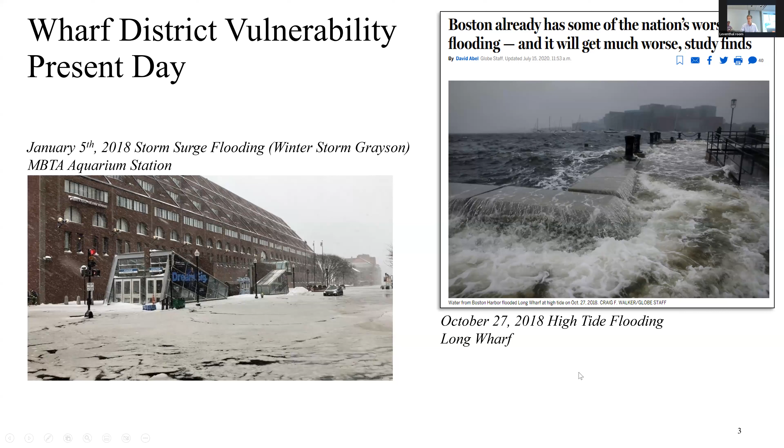And it's not just those storm surge events, it's also high tides coming over. We're seeing more frequently flooding over our harbor walks and into property areas, even during sunny days during our wicked high tides. So on the storm surge side, we produced this map showing the flood extents in the Wharf district. This is in 2070, based on the most recent modeling by Woods Hole Group that the state is using for all of their planning. This is a 100-year, or 1%, storm event - basically that Winter Storm Grayson, which previously extended flooding down Long Wharf and up into Atlantic and State Street. It's looking to push out even further into a lot of areas.

Can you explain - this was one of the most striking visualizations in the report - can you describe for a layman like me what is meant by a 1% storm surge? What is that defining exactly? It's a great question, an unfortunate term us techie engineers have used too often. It means there's a 1% chance of this event happening in any given year. That doesn't mean you've got a 1% chance of it happening in 100 years - it's a 1% chance in a given year. Those probabilities add up, so over a 50-year period you've got something like a 39% chance of this happening. We typically look at big infrastructure projects with a 50-year design life, so you're almost at a 1 in 2 chance of this occurring over that investment period, if you think of it in those terms. Thank you.

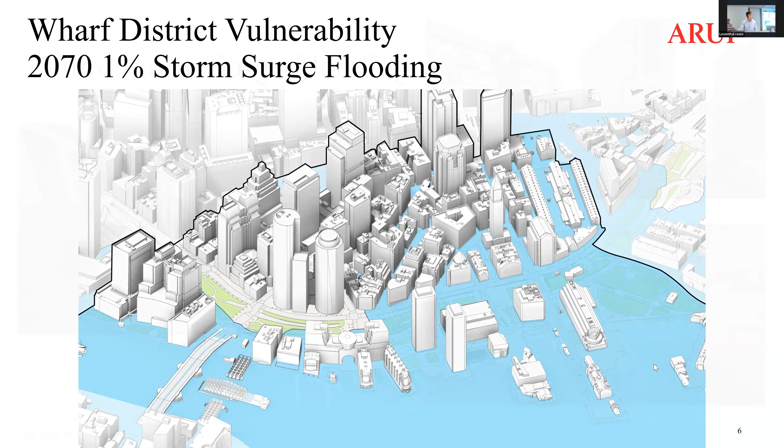This is not produced by our plan, but just to show these images produced by Boston Water and Sewer, showing what an even more frequent event might look like. This is a 10%, or 1 in 10 chance storm happening in 2070. You can see the flooding throughout the Faneuil Hall area and State Street.

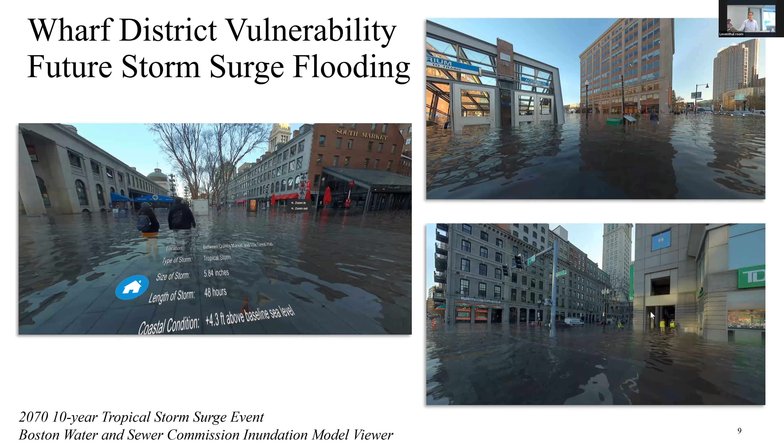As I mentioned, it's not just storm surges, it's also tidal events. So some of the numbers we've been looking at, as recently as 2021 we were experiencing 7 days of flooding during sunny day events, during high tides. We're currently looking at, just a few years later, 11 to 18 days. And by 2050, we're looking at 50 to 70 days of tidal flooding in Boston, is what we're projecting.

So these are frequent events that aren't just storm surges, and there will be a lot of nuisance flooding that we need to deal with.

So we've got waterfront transportation in terms of MBTA systems. We've got ferries, we've got tourism, in terms of all the various water boats that Matt and his team are running and everybody else out there. We've got marinas, we've got the Harbor Walk itself, all at risk if we don't have a flood protection system. We've got the aquarium, we've got MBTA's Blue Line and Silver Line, we've got the Central Artery Tunnel.

Bringing people into and through the heart of our financial district, as well as many historic assets and public assets throughout the district. And Derek, I think it's fair to say that that was the basis for coming up with the $3.9 billion of infrastructure that is at risk and is what we're trying to protect.

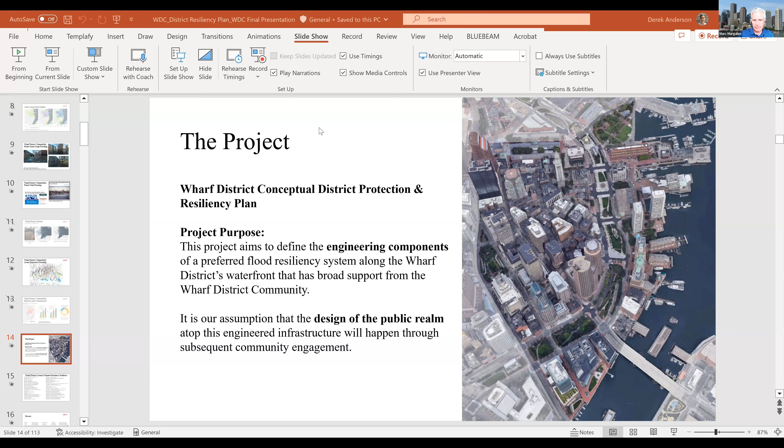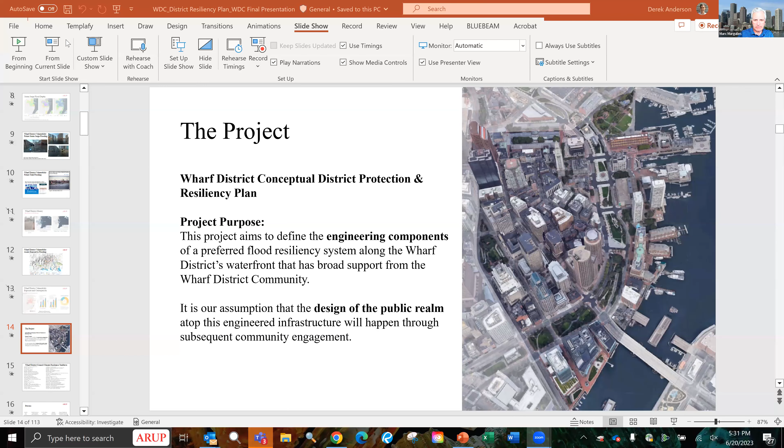Folks in the room, we're no longer hearing you. Oh, I just heard you. Yeah, the room is quiet. That's so strange. Norm, are you still there? I am, but I'm not in the room, I'm remote. I'm just gonna call Suzanne. The room audio is gone, it's gone for all of us. Tell Doug, just tell Doug. Make sure we're muted. Joe Christo just posted that there's a team in the room working on the problem. All right, we got some audio back from you guys. Try your... that was just a speaker. All right, we're giving this a try, can anybody hear me now? Yes, we can, that's fine. All right, I'm gonna have to just do it off your laptop, Mark. Turn the owl off and just use the audio on your laptop, perhaps. I think the owl, literally no one touched the thing and it just randomly started to... yeah, we heard the Zoom thing sort of go weird. Let me see, yeah, so we'll use Derek's audio. Yeah but I called in. Okay, I just muted the Leventhal room. Go ahead Derek, you should be good. My audio speaker. Yeah, leave that. All right, how are we doing now, can anybody hear me now? Yes, that's good, all right, we can hear you, go ahead.

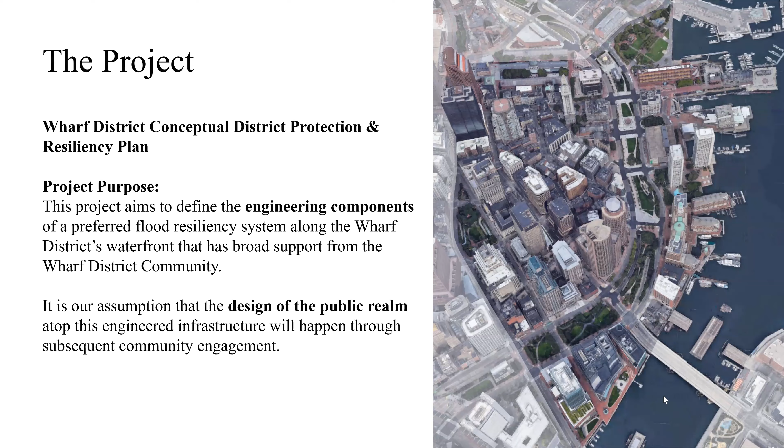Again, a big thank you to the Climate Resilience Task Force. A great number of folks with a great amount of information and knowledge contributed to this project. Thank you all, as well as many other stakeholders who've been involved in the process. I won't hold here too long, but it's fantastic to have a wall of text representing the people engaged in this process. I usually hate wall of text images, but in terms of the general process here, the Wharf District Council established a Climate Resilience Task Force that helped manage the process.

Then we dove into due diligence, collecting data. We established evaluation criteria, which built off the public engagement the city had done with their Climate Ready Boston work, as well as additional engagement with stakeholders throughout the district. We used those evaluation criteria to rank and identify preferred flood resiliency strategies, from which we created a series of alternative designs. We presented those alternative designs to various stakeholders, and with their input, developed a preferred flood protection strategy end to end of the district.

We solicited feedback from many stakeholders at that point on that preferred solution. And the result of all that community engagement is reflected in the final design plans and report, which we issued a couple of weeks ago.

We're now moving forward, really engaging the community in continued conversations about this flood protection system and what that means for the Wharf District and surrounding communities. We're looking to continue coordinating with funding and implementation agencies to keep the momentum going, really transition this to something actionable, and then support neighboring communities with their resiliency planning. A great amount has been learned through this process that we're looking to share with other communities, as well as coordinate with abutting neighborhoods.

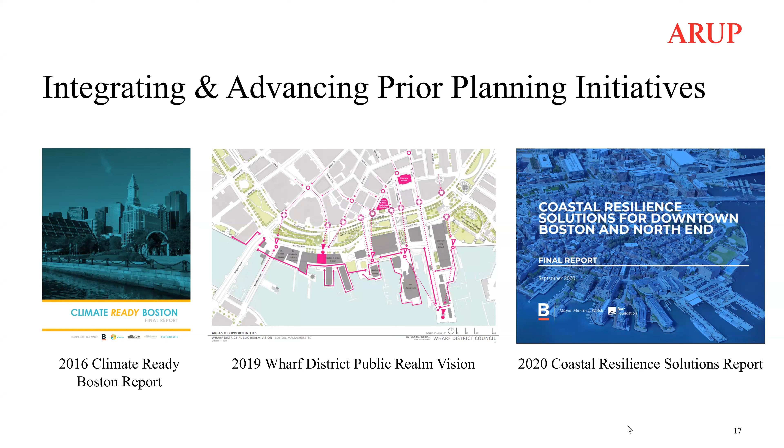As I mentioned, we built off the city's prior work: the 2016 Climate Ready Boston report, the 2020 Coastal Resilience Solutions report, which laid out a lot of the foundation for what we're able to do here, identifying design flood elevations at a variety of different types of locations and different types of strategies that could be applied, from which we were able to narrow down to our single solution, as well as the Wharf District's previous public realm visioning process in 2019.

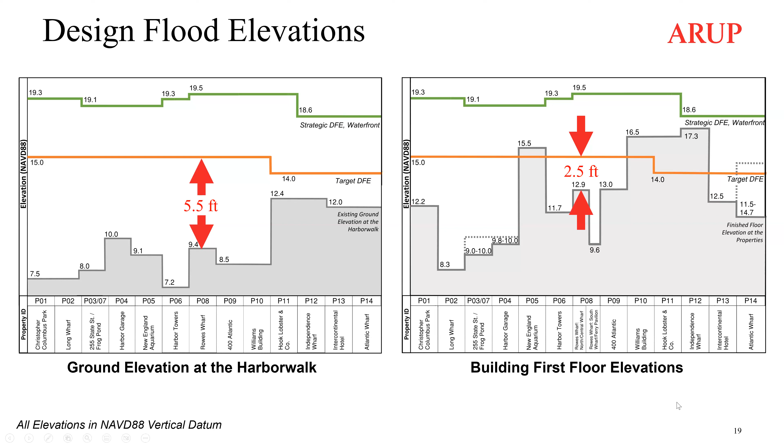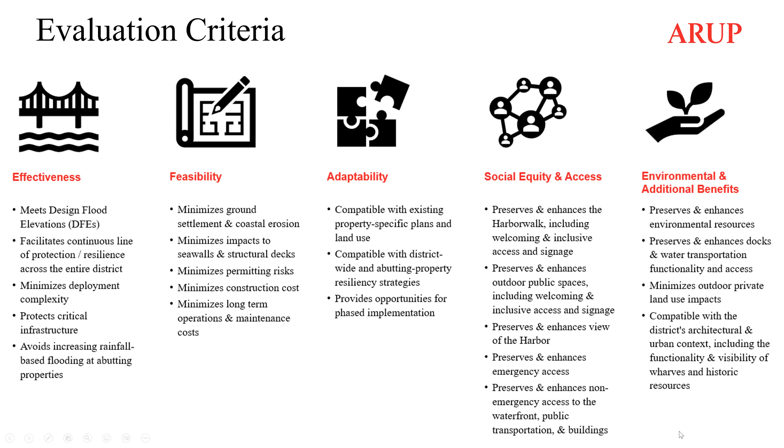This is really the decision-making process for when you look at one strategy and try to compare it to another. How do we do that in a transparent, repeatable fashion so that we're treating every property fairly to the same metrics? With this, we're able to rank different types of strategies for things like effectiveness, feasibility, and adaptability, as well as social equity, access, and environmental and additional benefits. This is a really nice tool that I think a lot of other districts can use and build upon.

One of the significant considerations in this process was social equity and access, particularly access to the waterfront, public transportation, and emergency access. We set out, and I think achieved, our goal of maintaining and really improving access in a lot of places, both emergency access as well as access to the harbor walk and to public open spaces, especially along the waterfront, accessible routes to the water and to various transportation opportunities.

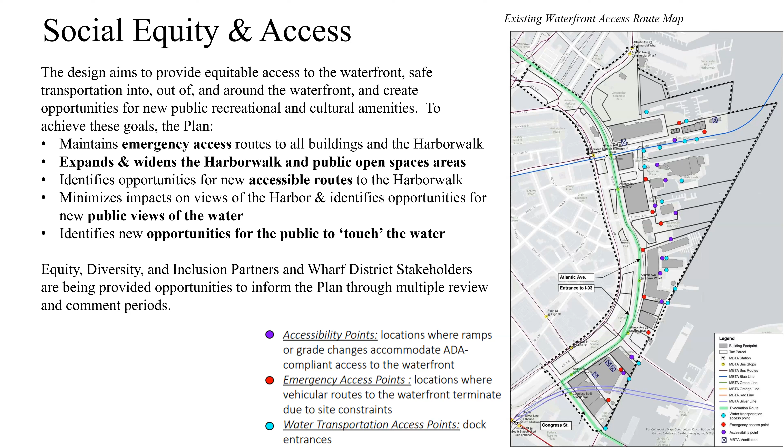To put it into numbers, this plan is about protecting from flooding, and that means real changes to the harbor walk, in a lot of cases raising the ground. We've managed to do that while also making things better, we think. We're creating 21,000 square feet of new harbor walk, over 90,000 square feet of new publicly accessible open space, and adding over 2,000 linear feet of docks, where water transportation, marinas, and water access is so important to the Wharf district.

That's at the district as a whole, as well as at each. We've identified 6 different projects within the district, and even at every single one of those projects, we're making sure to at least maintain, if not increase, each one of those metrics.

As for the resiliency plan itself, this is a plan of the existing conditions of the Wharf district. I mentioned we've broken down the district into 6 projects. We call those sub-district projects, just to make things a little easier to construct, as well as allow phasing so that we can address the most at-risk places initially and move on to the places that are less at risk as needed as time goes on.

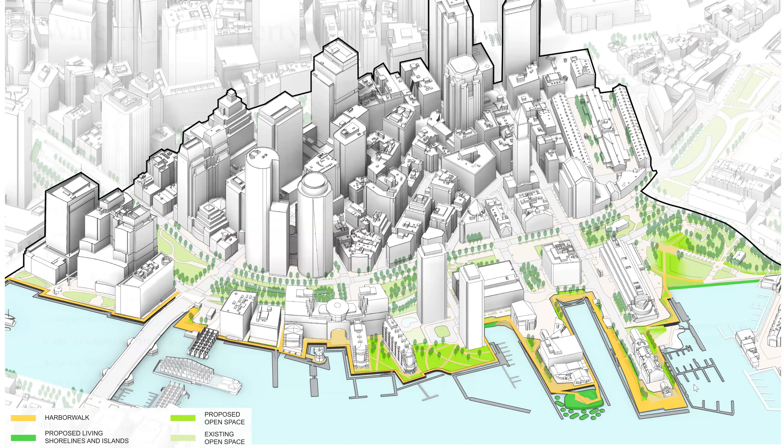I do want to highlight at this point, it wasn't just about a design. A big part of this process was the engagement process, where we had a number of workshops with various stakeholders in the district, in particular every property owner where we have private or public property where we need to install these flood protection systems, and those properties that need to be significantly modified in some cases to protect our district. We met with each of them, had a series of workshops, and I'm very proud to say we've been able to gain the support of every single waterfront property owner end to end of the district for this solution. So not just a design effort, but a big community engagement effort, and that really came from a lot of you all being part of this process and having a common goal and coming together around how to get this done as a community. So that's something I think to be very proud of here.

And also, this plan is not just a single waterfront solution. That plan I just walked through, on that beautiful image our Halvorson friends produced along the waterfront, is shown here just as a gray line for reference. We're also proposing a number of legs, if you will, flood protection systems that stretch back away from the waterfront system to natural high points in the district. Those are represented by these green lines on the screen here.

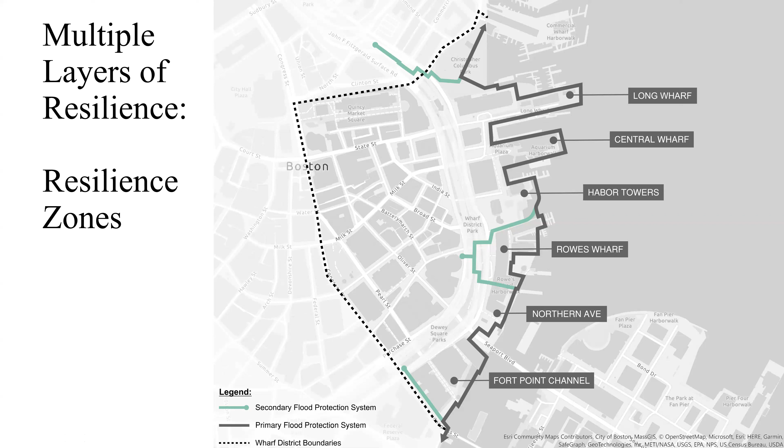So what each of those legs do as they come back in is create 3 resilience zones. Each of these 3 zones can be built independently of the adjacent districts, and they will be protected on day 1. So we don't need to wait for the entire city to come online. The North Resilience Zone, which includes Christopher Columbus Park down to Harbor Towers, can be built initially, being one of the most at-risk parts of the district, already experiencing flooding. We can build those little legs coming back into some high points there, and that area will be protected.

And then as the other zones come on, we start adding additional layers of resiliency. So at that point, those legs will act as a redundant line of protection, so that if there's a single point of failure anywhere, we don't have widespread flooding throughout the district.

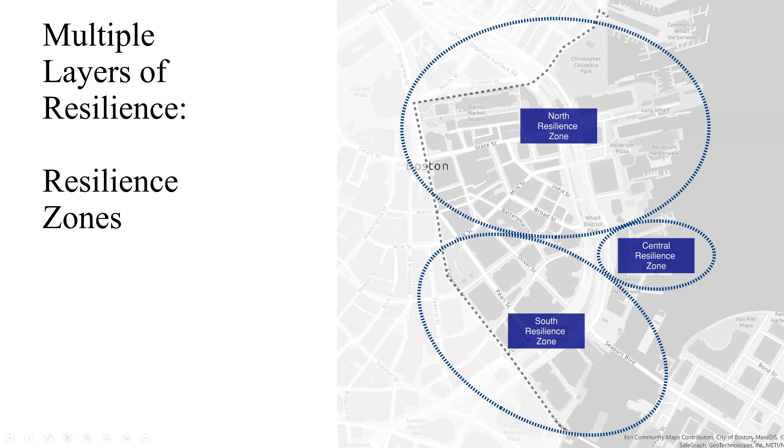The plan that's proposed also provides a number of community benefits. This is an example cross-section at Harbor Towers that I think illustrates some of the opportunities we've identified.

In addition to protecting from storm surge flooding, we're identifying opportunities for new shade trees and shade structures to deal with the heat issues out here. We're also identifying extensive new stormwater infrastructure to deal with rainfall on the dry side of these systems, including new storage tanks and pump systems.

There's lots of new public waterfront open space throughout the district, maintaining accessible harbor walks and identifying ecosystem opportunities. In many cases these ecosystem opportunities aren't necessarily green vegetation, but there are things we can do to soften that edge instead of just having a vertical wall with no ecosystem benefits that results in significant wave height. We can provide riprap and other solutions, revetments along the edge to soften things up and create opportunities for filter feeders and similar organisms.

And then, of course, one of the things that makes the Wharf District what it is, is the wharfs — the operating waterfront, the docks, the marinas — so really maintaining water transportation throughout.

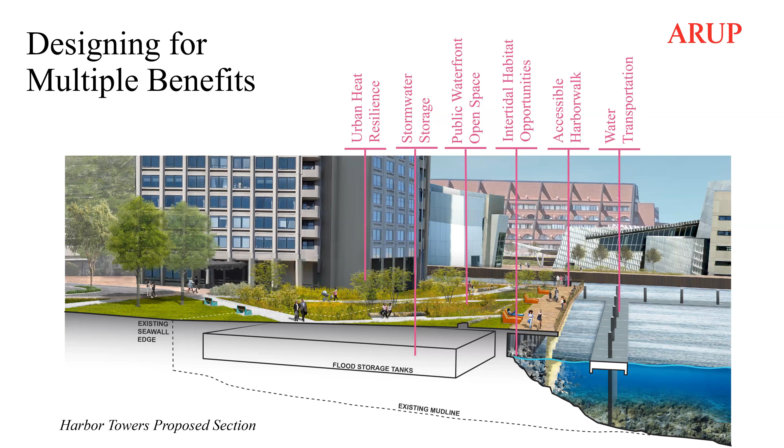This next image puts a bunch of little stickers around the Wharf District where we've identified many additional benefits that go beyond flood protection: opportunities for water recreation and transportation, new views from the water that don't exist today, improved access to the harbor walk in many places, and vegetation, shade structures, and ecosystem benefits.

Again, at this stage we're really just identifying opportunities. This is a concept design we've done, and there needs to be more study and more conversation with the community about what the right solutions are. What we've done here is identify those opportunities so we can start having a meaningful conversation about how this plays out as designs advance.

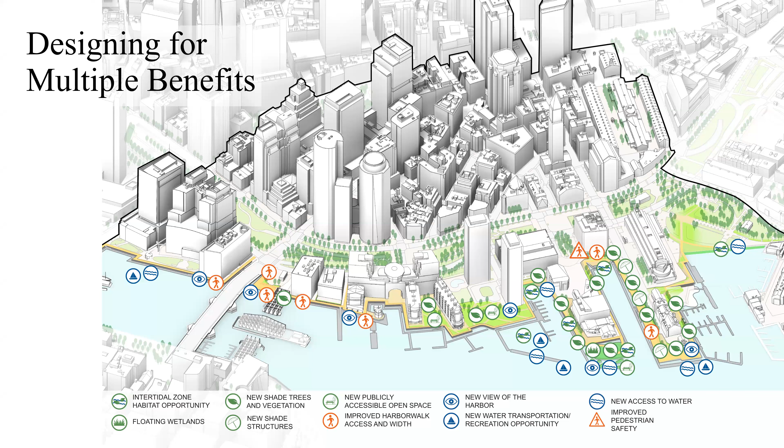One of the other benefits I mentioned is stormwater. As I said, this addresses storm surge events and groundwater through deep cutoff walls we're putting in at many places. We're also installing under-drain systems to manage groundwater to a safe level, and we're addressing rainfall as well.

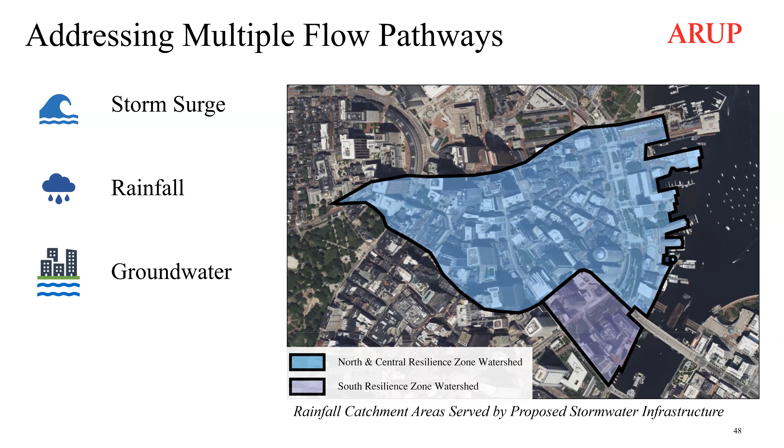So our solution to that was to identify extensive opportunities for stormwater storage and pumping systems. Everything shown in blue on this screen represents a storage tank or storage system proposed as part of this plan. As I mentioned, at Rowes Wharf and Harbor Towers we're going a little outboard there.

One reason for that is we have a real low point in our district just adjacent to that area, particularly over by 255 State Street, where it's very densely developed. There's a lot of water transportation there, but not much opportunity specifically for storing water. However, we can bring that water with new drainage pipes to the north storage systems at Harbor Towers, as well as a tank at the Central Plaza area in front of the aquarium, under Rowes Wharf, allowing that rainwater a place to go to be managed safely. We'll have storage systems there, and Harbor Towers is supportive of a pump station on their property to manage the water levels in those tanks.

Additionally, we're including a tank over at Christopher Columbus Park that's already being proposed by Boston Water and Sewer, so we're really just adopting their plan there. We've identified additional storage through the southern areas of the district as well, and pump stations at Christopher Columbus Park, down in the Fort Point Channel, and at Northern Avenue.

Matthew, I think you raised your hand.

Well, this helps to address a concern that a few folks have brought up to me after they looked at the plan. I hate to use the word barrier, but the elevated harbor walk, the concern that on the dry side, it could become sort of a bathtub if rainwater collects and isn't able to escape. I think this helps address that concern, but that's one of the questions that has been brought to me as people look at this.

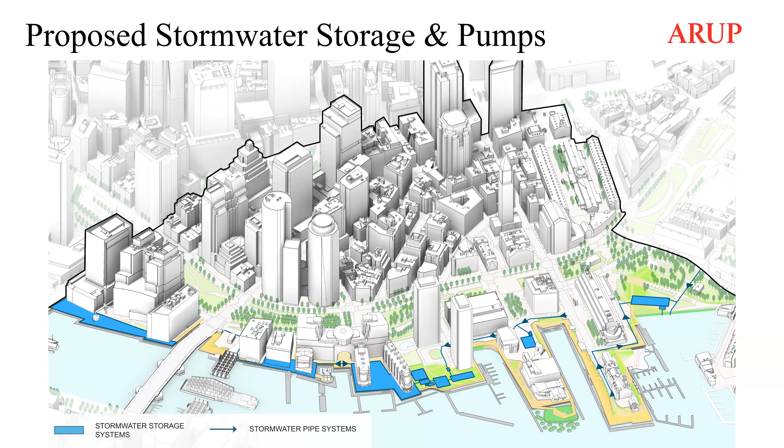The next few slides—we're coming up on the end of the presentation here. These are really some of the graphical images that just go through that plan I've already talked about, and then some cross sections. So we're going to start over at Christopher Columbus Park at the north side and work our way through the district.

As I mentioned, we're raising up some of the ground in the park area to act as a flood protection system. We have our living shoreline there. We're raising up the harbor walk.

All the way around Long Wharf. I think it's very important to note, BPDA is currently doing their own study at Long Wharf for flood protection, and they're going to come to their own conclusions about the best solution there. We are working with their team—they're very much engaged in this process, as they have been from day one. But they're currently doing their own study here that will have significant community engagement as they work through the designs for Long Wharf. But we felt it was important to include this area in our design so that we can really talk about the context and how all these different parcels interface and come together in a contiguous flood protection system for the district.

Similarly, Boston Parks and Rec Department is planning on doing a new project at Christopher Columbus Park that will include resiliency components.

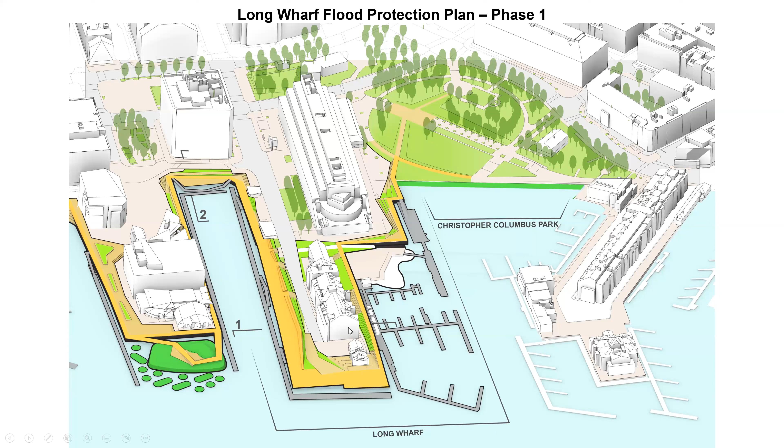And on the next slide, the proposed conditions. So you can see here what I'm referring to as we elevate that harbor walk up. It creates a new gradual transition from that lower elevation to a higher elevation with opportunities for vegetation and hopefully a very inviting and welcoming environment for folks. So we're not cutting people off from the water—we're welcoming them to it while protecting the district from flooding.

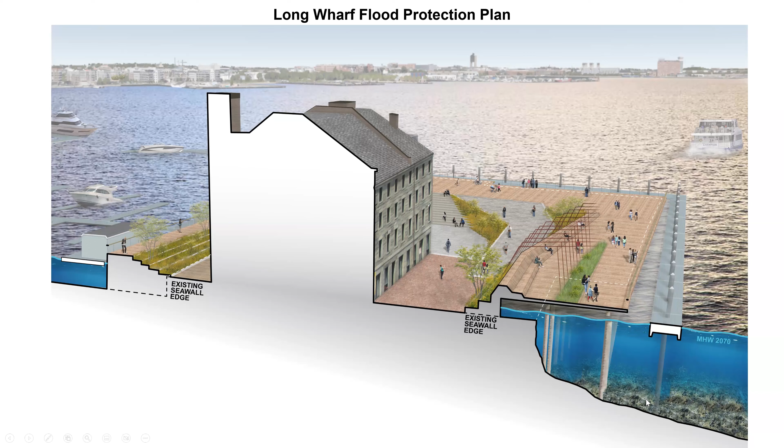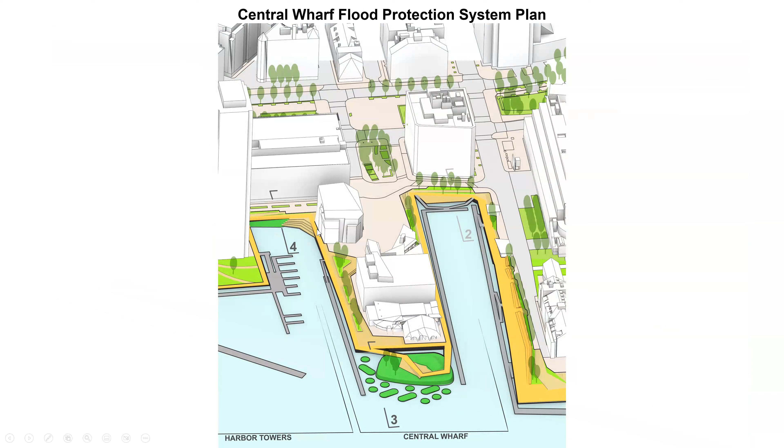I will note here, we are narrowing Old Atlantic Avenue down to 21 feet. It's about 30 feet today. So we still have two-way traffic here, but we are relocating some of the layover spaces from here over by the Aquarium T Station and Atlantic Ave, because we really do need to pick up that space that we need for this gentle transition.

If we don't take out that 10 or so feet of that roadway, we end up with a hard wall here and a real visual disruption for people—what we would refer to as a barrier in a lot of ways. And we're really trying to avoid that, acknowledging that we can't go out in the water without impacting the very important water transportation that's so crucial to so many folks here at this particular location.

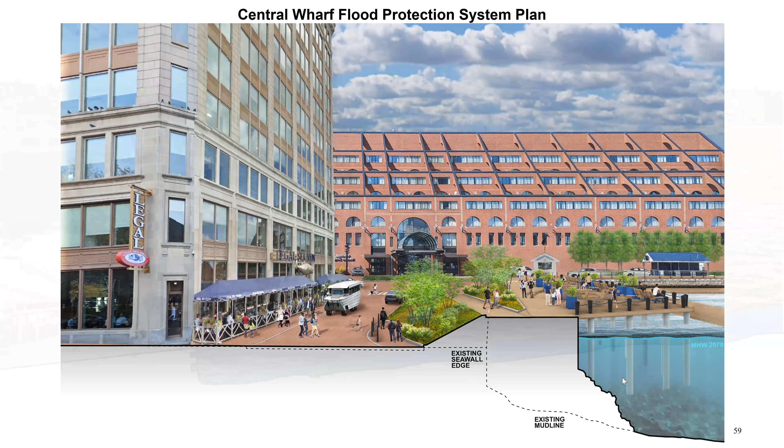So we look at the aquarium today and in the future. This is the flood protection island I was referring to, with opportunities for wetlands and ecosystem benefits throughout.

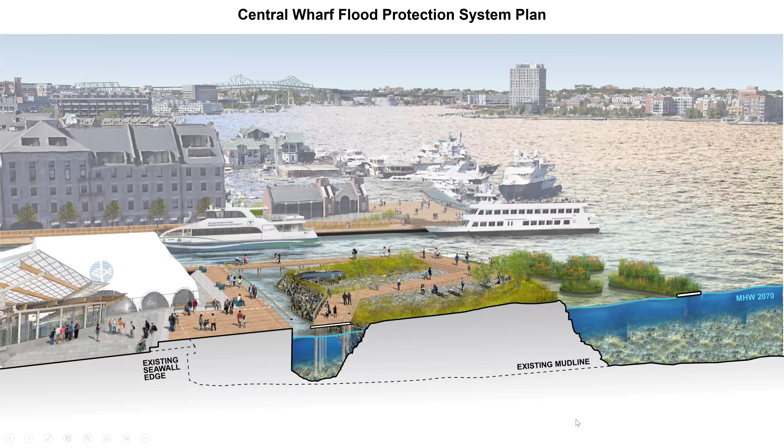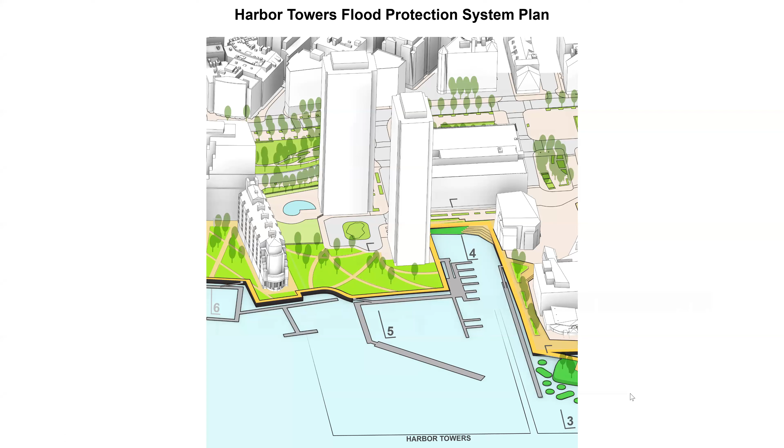As we move down to Harbor Towers, again, elevated harbor walk, and then that new publicly accessible open space in front of the towers. So first we'll look just in front of the garage here. This is the harbor walk today.

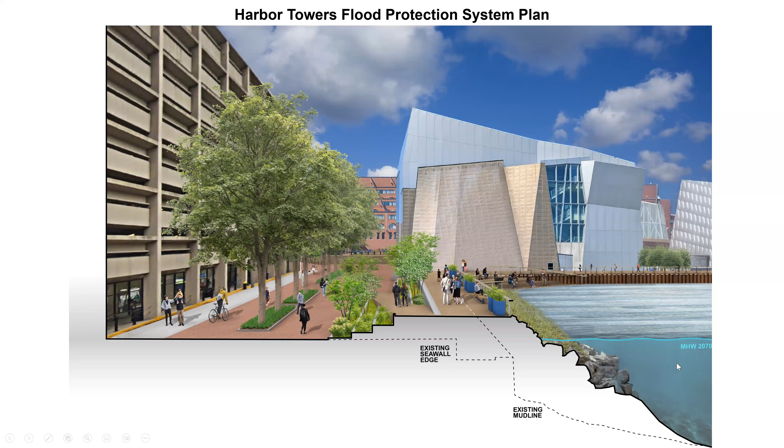You can see we step down to get to the water today. We'll be coming up to get to the water tomorrow. I will note all of these access points are all designed—we've looked at the layout, the geometries out here, and really made sure that these are truly accessible. Everything's less than 5%, none of these are ramps. These are really walkways to get up to the harbor walk and make your way back down. You can see that living shoreline as well as places in the background for people to get down and interface with the water itself.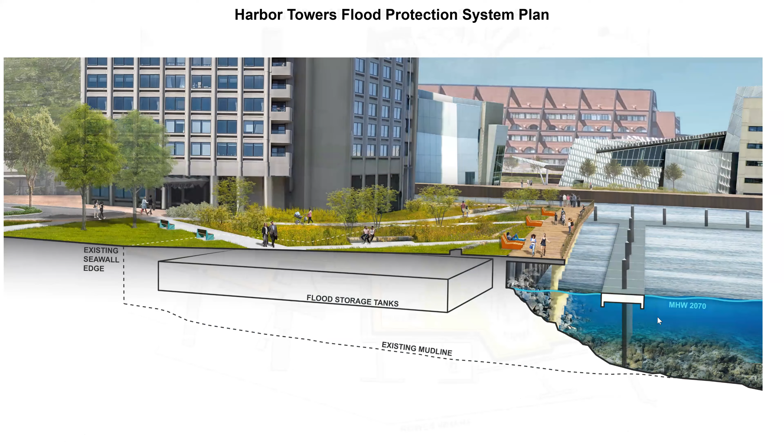So this is today, and then that harbor walk gets raised up basically close to the first floor elevation of the building. Where today you would step down a little bit to get to the harbor walk, it'll be pretty flush there tomorrow. And again, creating lots of storage for rainwater storage.

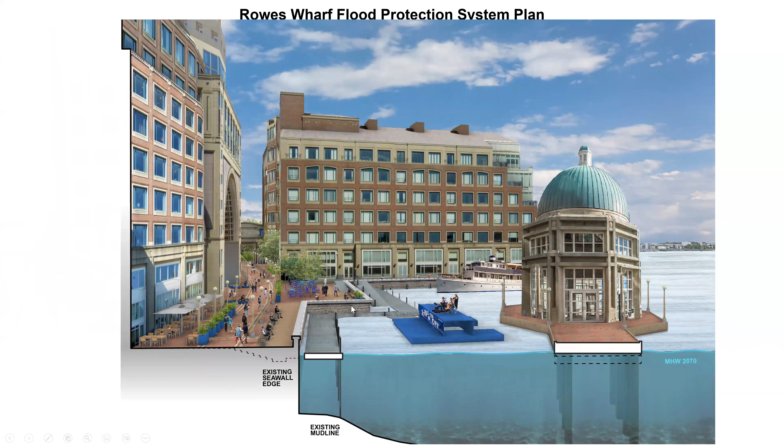And the central area of Rowes Wharf today, again, stepping down to the harbor walk, gets flattened out, and we have a new flood protection wall along the edge there, while maintaining a lot of that water activation that happens today.

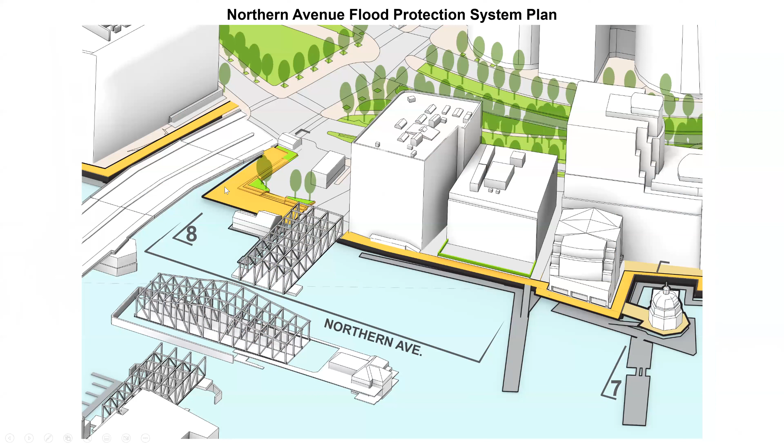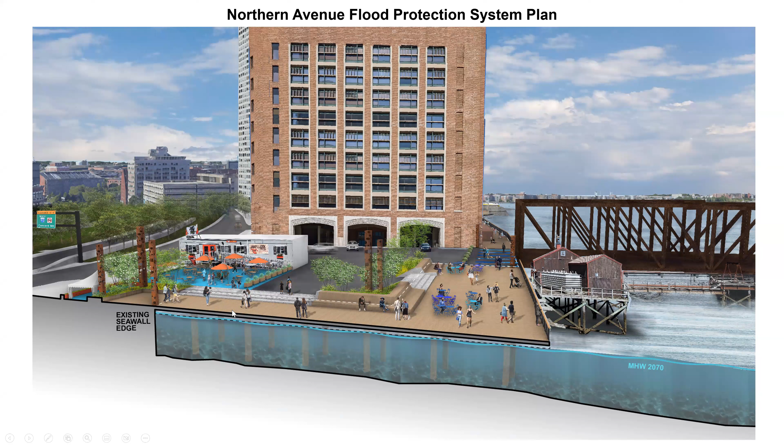So move down to Northern Avenue, elevated harbor walk throughout this district, this project area. This is what the James Hook site looks like today with the burnt out docks here. We are including rebuilding that area so that the harbor walk becomes accessible again, providing a new pedestrian connection in terms of a small bridge from the Seaport Boulevard bridge there, the Moakley Bridge, over to the harbor walk. As well as removing those stairs that are in front of the Coast Guard building today, and removing that barrier to access to the harbor walk with a flush walkway throughout the area.

This plan is really separate from any individual proposals to build new towers or buildings in the area. This can be done without that. The James Hook Co group is on board with this plan. So we would envision a harbor walk through this area. I don't see it precluding their ability to put a tower in there someday. No, this is in fact consistent in terms of the harbor walk with what they had proposed for that building. Whether the building goes ahead or not, they would never put a building footprint in this area. They would not be permitted to, and they didn't intend to. So this is independent of that.

Then our last project area, the Fort Point Channel, again an elevated harbor walk here. I will note today the harbor walk goes through Independence Wharf's building. It has relatively low head height through that area. For a few reasons, as well as to address some of the structural considerations at this particular area, we are pushing the harbor walk outboard of that building, which will create better views of the water from there and probably a more accessible harbor walk, but that's necessary from an engineering perspective as well as just being a general benefit there.

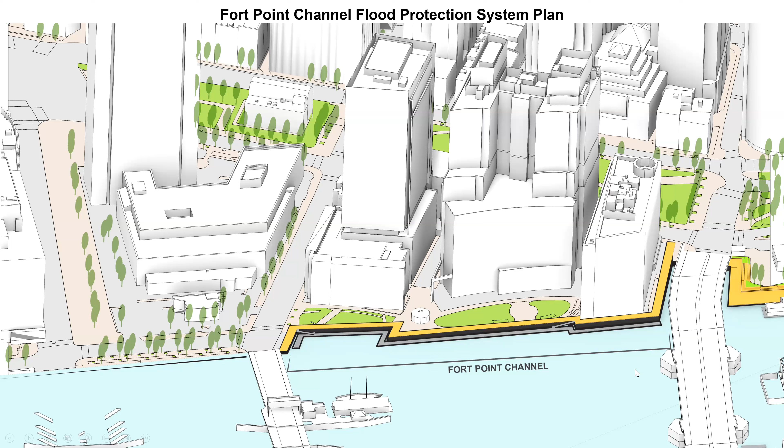And it is our understanding that the city and the Corps of Engineers are progressing to study this currently. That's right, yes.

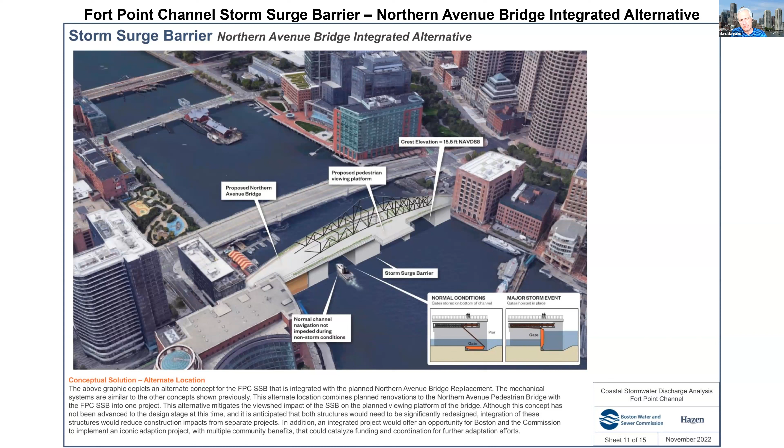So we pulled together, that's really it for the plan. I've only got a couple more slides here and then we'll open up the conversation. I won't go through this in detail, but if anyone wants me to come back to it, let me know.

But even when this comes in, there are a lot of waterfront properties that we strongly recommend, and the BPDA recommends, provide protection systems at their own buildings as a second layer of protection, in addition to what we're proposing at the waterfront.

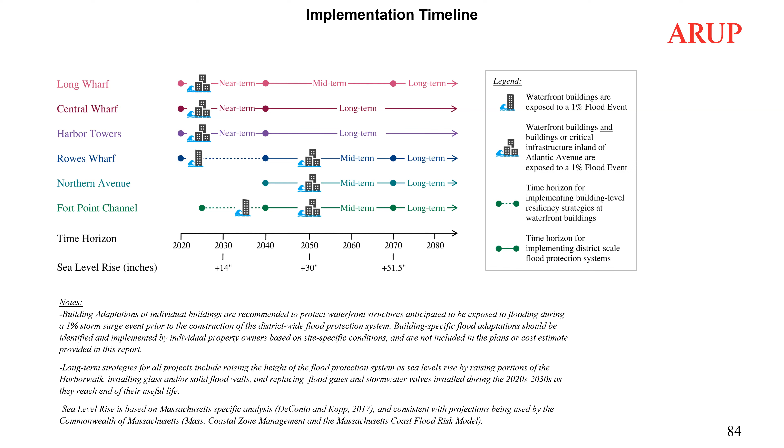We have identified costs for the project. We're generally looking here at, I'm sure everybody's eyes will zoom into, that total of $877 million for the entire project. That includes near-term, mid-term, and long-term costs. I'll note this is a construction cost. If you've been following the news and seen a few articles out recently, some of them will quote this number.

Some will quote a $1.2 billion number. That $1.2 billion is really looking at the construction costs plus design costs plus 50 years of operations and maintenance costs. So if you're seeing different numbers, that's why. This is really looking at construction costs, and we break it out by phasing as well as by each of those 6 sub-district projects.

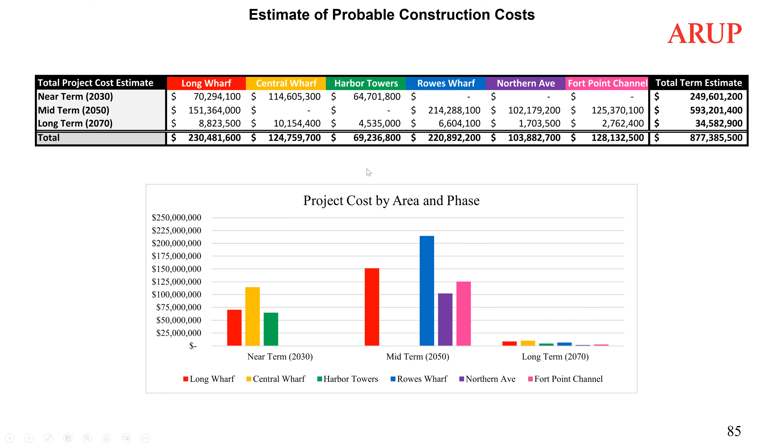Just to put things in perspective, we've looked at a few comparable projects, ones currently in construction or about to start construction, mostly in the New York City area, as they've progressed things to construction now at scale. We're seeing that per linear foot of coastline protected, we're in the same ballpark, in that 110K-ish range.

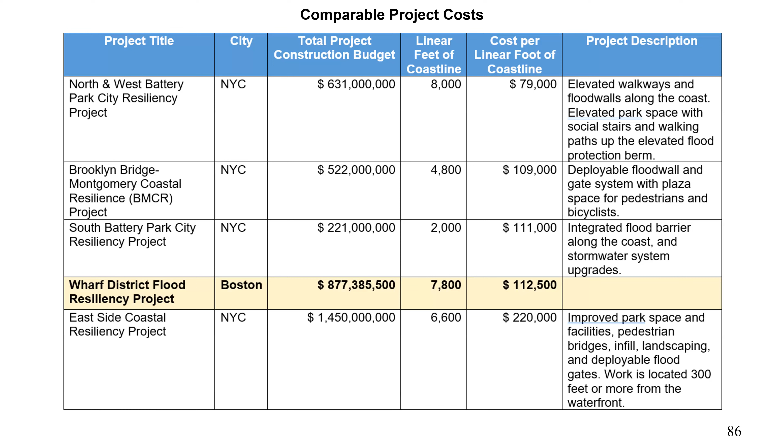As Mark noted, this project protects against $3.9 billion in damage from flooding over that 50-year time period. So when we look at the cost of the project, the all-in cost of $1.2 billion, we compare it to those losses we're protecting against. We have a very positive benefit cost ratio, which is a good justification for why this project really should move forward.

We've identified some funding opportunities, so just different programs that are available for funding.

Norm has raised his hand. Jump on in, Norm. Hi, Derek. As usual, great presentation and fantastic work that you folks have done. Two questions come to mind, or one actual statement.

On the cost-benefit analysis, I think as we go forward we need to include another line there, because doing what is proposed to the Harbor Walk will make the Harbor Walk more attractive for tourists and for locals, and it will bring business in.

And the net positive benefit of additional revenues that come in should be part of the cost-benefit equation. Yeah, absolutely. And the second thing is more of a question. We frequently get the question of views of the water from a little bit inland of this new harbor walk, and how much that will be cut off. I think it might be worthwhile mentioning how your design has gradual increases in elevation as you approach the harbor walk, so you start seeing the water well before you're at the edge.

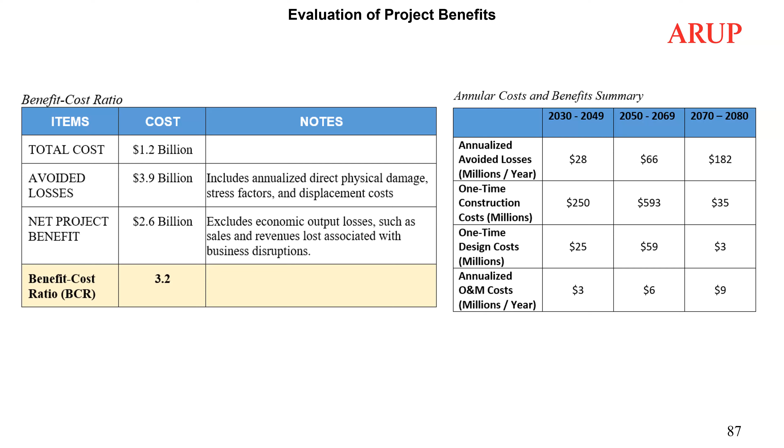I want to jump on to the last, I think, 3 slides here so I can get off the numbers. And we can certainly open it up to more conversation, but just the last things here, because I do think it's quite important. I mentioned we are recommending all property owners who may be impacted by flooding, not just along the waterfront, including them, but also the inland property owners, look to continue to protect their properties.

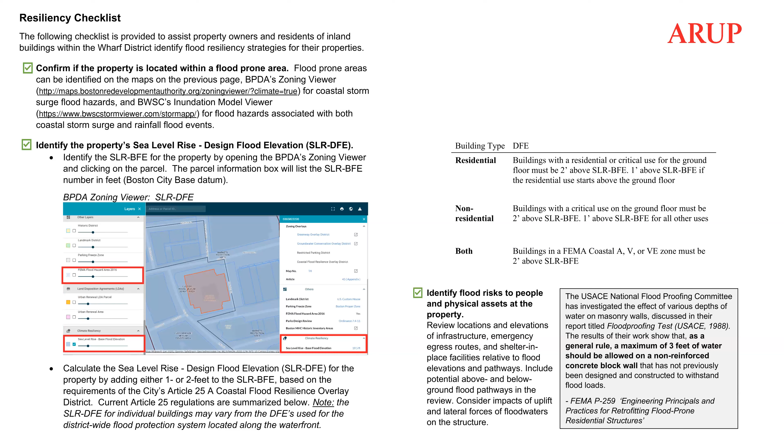We have created a set of building level resiliency guidelines, which really build on what the city has already done with their resiliency guidelines, and just try to strip it down. So we have a relatively short checklist that we think will be informative of what process folks need to go through, in terms of how to identify if they're at risk of flooding, and then what steps to take next. It's, I think, just a 7-ish point checklist there.

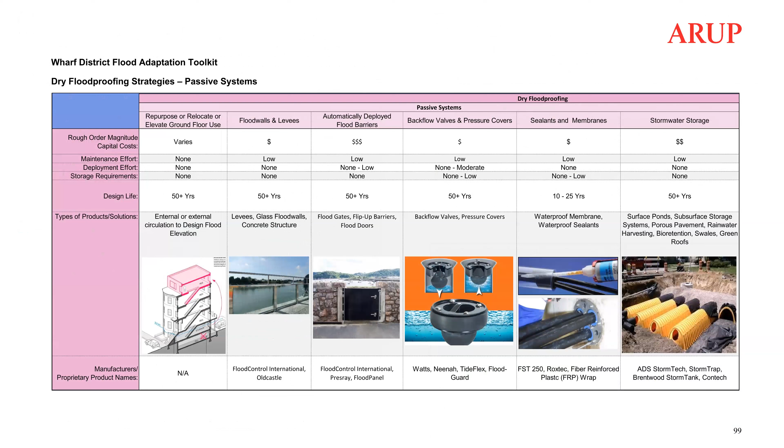And more at the building level, it just talks through some different types of strategies and considerations for protecting individual buildings. So we do have that as a resource for all folks in the district. And with that, I will wrap it up here.

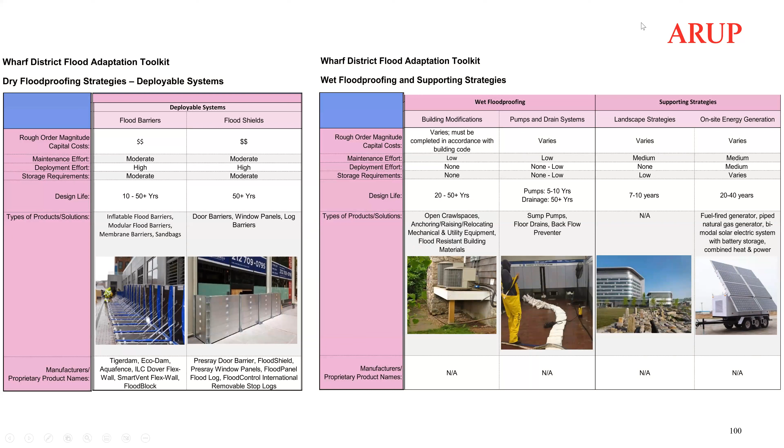So I will... that's not what I want to do. I want to keep your mic open, because I think you are the mic.

Yep, not a problem there, and happy to take any other questions. I don't know where we're at on timing here at the moment, but...

While people are thinking about the questions, I would share the fact that Derek is making a number of these presentations on our behalf to a whole variety of other agencies, entities, neighbors, and interested parties. I think you already presented to the ULI group, did you already, Derek? Yeah, we presented at ULI's Northeast Resilient Cities Summit down in Falmouth a week or two ago. We've had a number of conversations with Boston Harbor Now. We're presenting at Boston Harbor Now's Public Use Forum, I probably get the name of that a little bit off. I think it's on the 28th in the morning. And yeah, we've got a few other presentations coming up as well.

And we're trying to get to all of the electeds, at both the local, state, and federal levels. So anybody who has thoughts about who else would find this to be interesting or useful, please let Suzanne know so that she can share that with the committee.